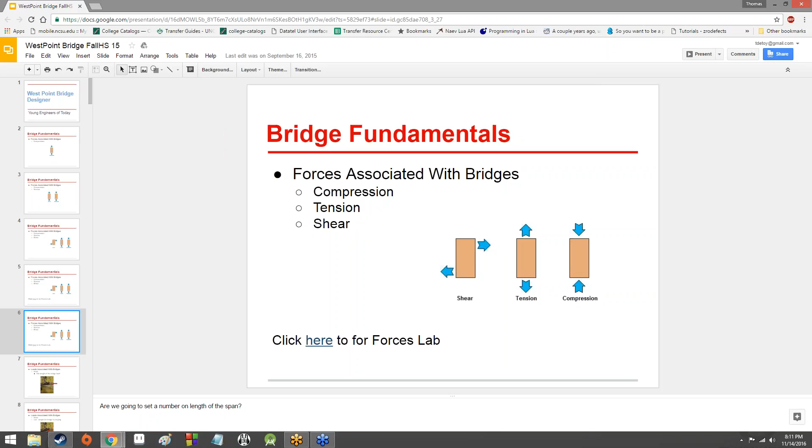Loads will cause stresses on the bridge. The most basic load, and if you can't have a bridge that handles this load then you've not built a very good bridge, is a dead load, which is just the weight of the bridge itself. You build a bridge out of materials, and those materials aren't going to weigh nothing. We haven't devised entirely weightless materials yet.

We have to deal with gravity. It's a fact of life, it's reality. So the materials themselves are going to exert forces on the bridge just by virtue of the fact that they exist.

Your body exerts force on itself by virtue of the fact that you weigh something. Your head exerts a force on your neck. Your arms exert a force on your shoulders and your back. Your torso exerts a force on your legs. It's just kind of how it is.

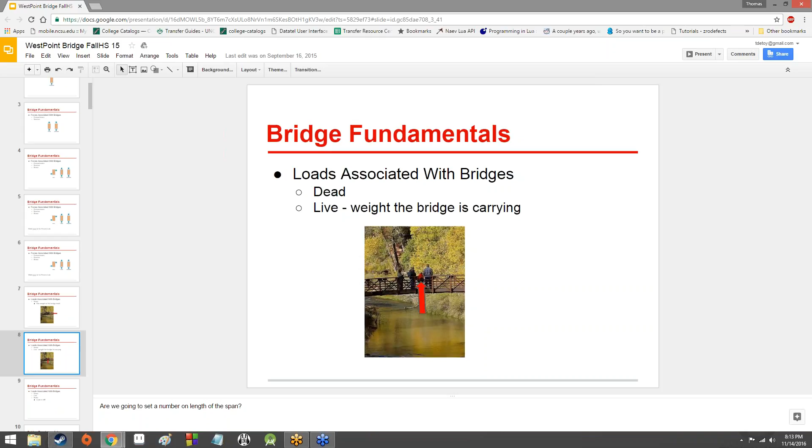Now, there are a couple different kinds of live loads. Live loads could be static, so the load is still - those could be toll booths and signs and things like that. Or they could be dynamic and moving, so they could be cars.

And it's important to note that loads can move between static and dynamic. A car could be driving across the bridge, hit traffic, and have to stop - and they've just gone from a dynamic load to a static load. Then the traffic lets up and the car can start moving again, and they've gone from a static load back to a dynamic load. So it's not outside the realm of possibility that loads won't stay either static or dynamic. You have to deal with that as well.

Then you've got thermal load, which is basically just load created by the atmosphere making the bridge hot or cold. So if it's a really sunny day, the bridge could get hot. Dead of winter after it's been snowing, or a clear night in the dead of winter, the bridge will get cold.

And these can actually be loads on the bridge as well - how many of you have accidentally stuck a drink in the freezer overnight and had it either overflow or explode, once you remember it the next day? If you have, that's because thermal expansion is a thing. Water, as it goes from a liquid to a solid, expands. And that actually causes all sorts of havoc for infrastructure for a number of reasons.

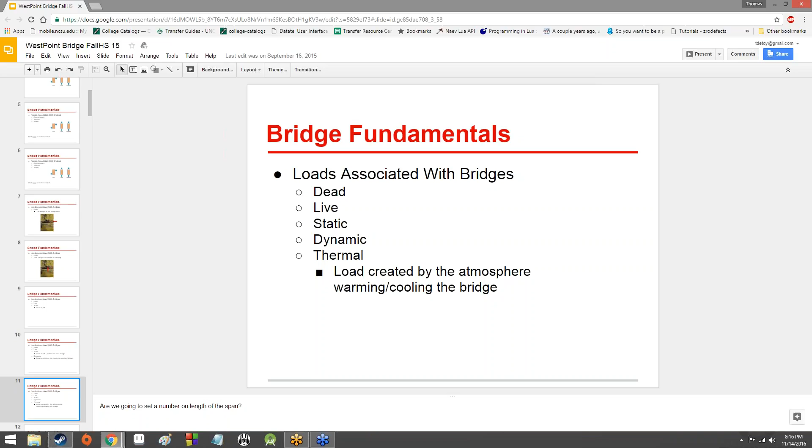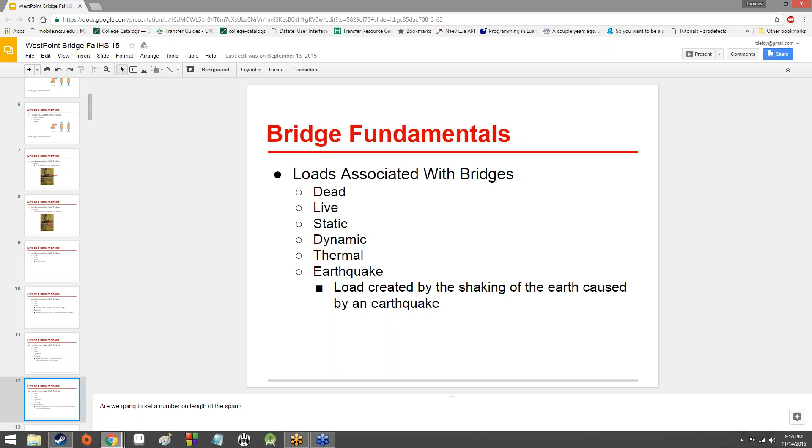More obviously, there are earthquake loads, which is a load created by the shaking of the earth. Seems pretty self-explanatory. You got wind loads created by wind shaking the bridge, causing it to sway or vibrate. And those can actually be really, really nasty, much more so than you might anticipate. If you're thinking, oh, if your building falls over because the wind blew it over, you got a really bad building, or if your bridge falls over because the wind blew it over, what a bad bridge - yeah, okay, you wouldn't be wrong, but not necessarily for the reasons you're thinking.

There are physics glitches, which is not really a proper way to put it, but it's kind of how I like to think of it, that can do surprising things to structures. Aside from the fact that wind is just really, ridiculously strong - that's actually something we touch on a little bit later in the lesson, an example of a large bridge that collapsed because of wind.

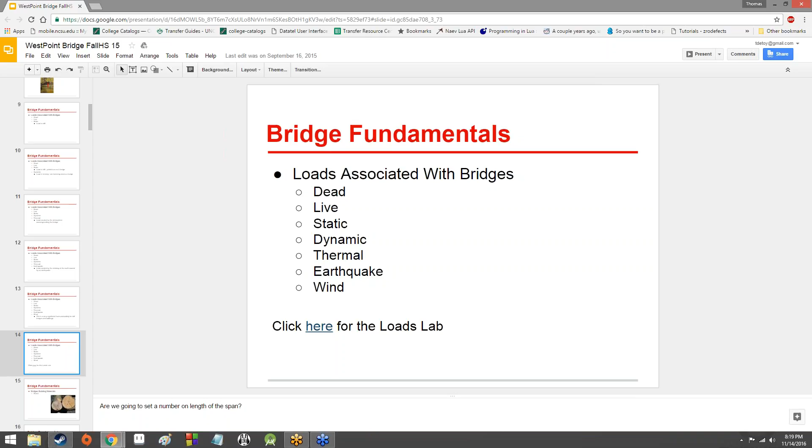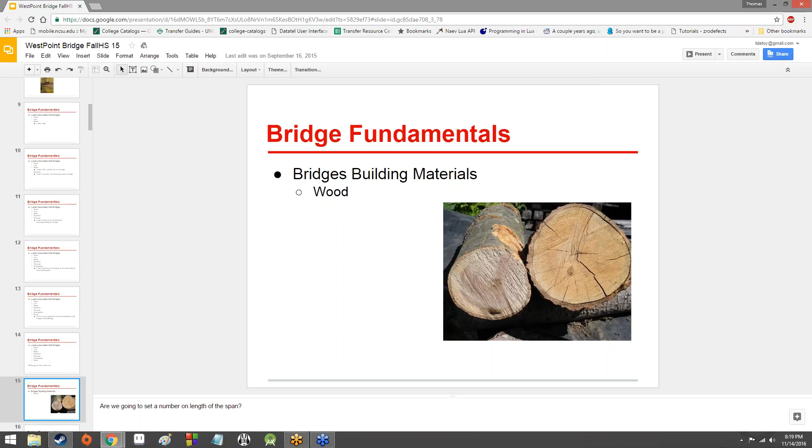Anyway, materials are also an important thing to take into account. For instance, you can build your bridge out of wood, and then you've got a wooden bridge. A wooden bridge can be pretty good because it's pretty cheap, and it can also handle tension and compression pretty well - it's strong, but it's also pretty flexible. So as the bridge starts to compress at one point, the wood's like, no problem, I got you. And then another part's going to start to stretch out a little bit, and the wood's like, nah, it's all good, just let me know when you're done and I'll go back to my normal length. And it's fine, it does that very well. On the other hand, it is super cheap too, which is really good because it's just a tree - you just took a tree and kind of shaped it.

But on the other hand, wood can rot, and you have to replace those pieces that rot. It can bow, which means you have to replace it with fresh wood, because at a certain point, if you bend wood enough, it's going to stick in that particular way - kind of how old boats were built, and new wooden boats are still built that way too. But that bowing will cause stress on the bridge, because a piece of wood that's bowed from age and force exerting on it isn't going to hold its weight nearly as well as pieces of wood that are nice and new and fresh. So for that reason, you do have to spend a fair amount of money actually maintaining the bridge. Where the wood can be cheap, if you have to pay the material costs to replace that wood over time, it's not really all that cheap.

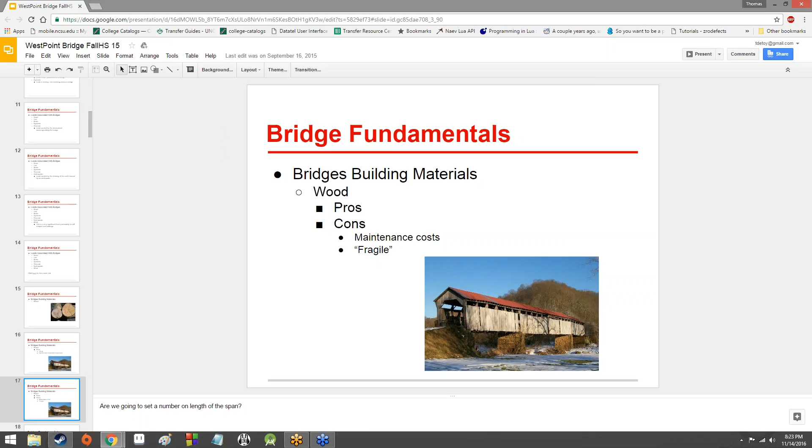Boats definitely, but bridges less so. Because boats and planes and stuff like that, you definitely want a fair amount of rigidity in there too. You do want some flexibility, because like the old saying goes, if something doesn't bend, it breaks. But you also want a fair amount of sturdiness and rigidity in there as well, more so than you'd want in a bridge.

So you've got wood, you've also got concrete. It's cheap. Concrete's cheap, just a bunch of dirt mixed together in a specific way and then laid out, basically building a dirt and rock bridge. When you put it like that, how could it not be cheap?

It's very good at handling compression. Concrete don't care if you try to smash it, concrete just sits there. It's fireproof. If you tried setting a regular rock on fire, it doesn't really do all that well with fire, granted there are certain types of rocks, but yeah, concrete tends to be pretty fireproof.

It tends to be pretty weatherproof as well. Stuff like wind and things like that, it tends to hold its own pretty well against, with a couple of exceptions. But it doesn't handle tension well. Concrete will crack under tension, just like people do - although that's more emotional and psychological tension I was referring to.

Concrete isn't one of those bendy rocks. And concrete is impacted pretty strongly by thermal load. Concrete tends to be fairly porous, so water will get in there, and if things get cold, the water freezes, and it just wrecks the concrete from the inside out, totally demolishes it. Then suddenly you've got this wrecked empty spot in the middle of it, and cars drive over it, and the hard outer shell breaks.

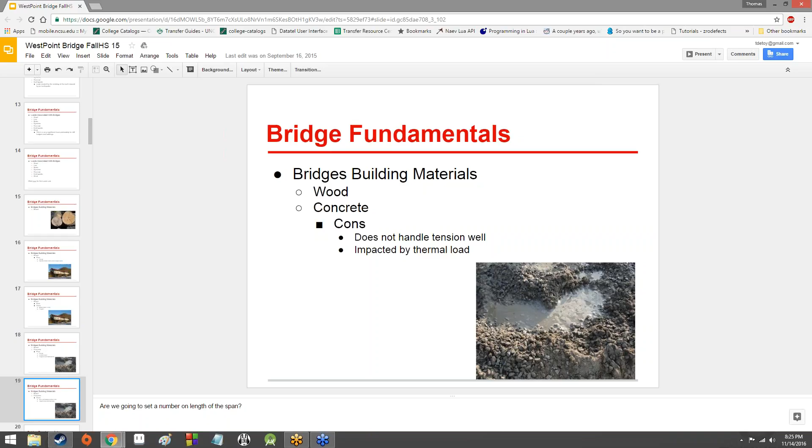So in order to increase that structural integrity, you might reinforce the concrete. You might, as you're making it, stick a whole bunch of metal bars inside of it, which can be pretty effective. In fact, it does a very good job at increasing concrete's ability to withstand tension, because concrete does very well with compression - press on it, concrete's like, yeah sure, okay whatever. And then you start trying to pull the concrete apart, and it goes, oh no, I don't do very well with this. And then the metal inside goes, don't worry, I got you.

I'm providing some additional structure so that you don't actually just crack and fall apart. And in case you do crack, you still got me for structure. I handle tension pretty dang well. And so it tends to have a pretty solid design. It's also still low cost because you don't really use a whole lot of metal, and you don't use a whole lot of expensive metal. And the bulk of your building material is, well, still rocks.

It's fireproof and it's weatherproof, just like concrete is. However, it still doesn't do very well with thermal loads for the same reason, and just the fact that the metal will also expand and contract, and that will kind of play havoc on concrete. So, pros and cons.

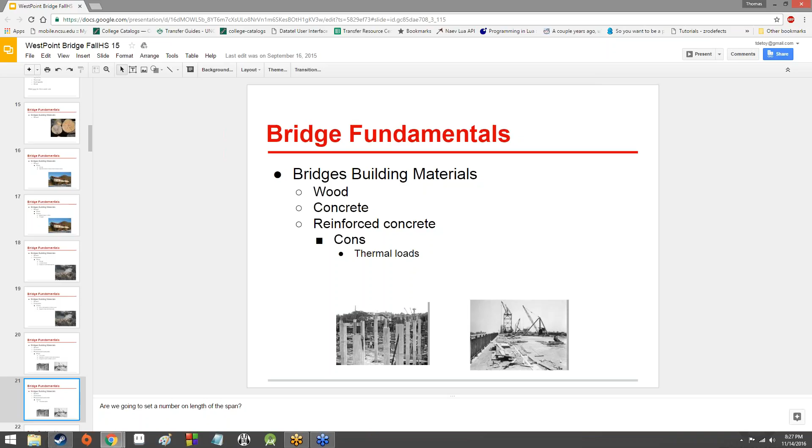This is a very common type of bridge. It's reinforced concrete. You'll see this a lot.

So cast iron, now we're entering into the pure metal bridges category. Cast iron is good, it forms in any shape. The name comes from creating a cast and then putting iron into it. It's good for casting, so it's cast iron because it's cast, then it's iron. So cast iron.

It can form in any shape, so you can do more complex, exotic designs for your bridge, something more efficient at distributing weight, or maybe it's prettier, if that floats your boat.

It handles compression pretty well because it's metal. It's cool with it. And it's fireproof because metal doesn't really burn, it just melts generally. And if your bridge is melting, you've got bigger problems than your bridge losing structural integrity.

Your more pressing problem is probably the fact that the ambient temperature is high enough to cause metal to melt, in which case you should probably find a new place to be like 30 seconds ago.

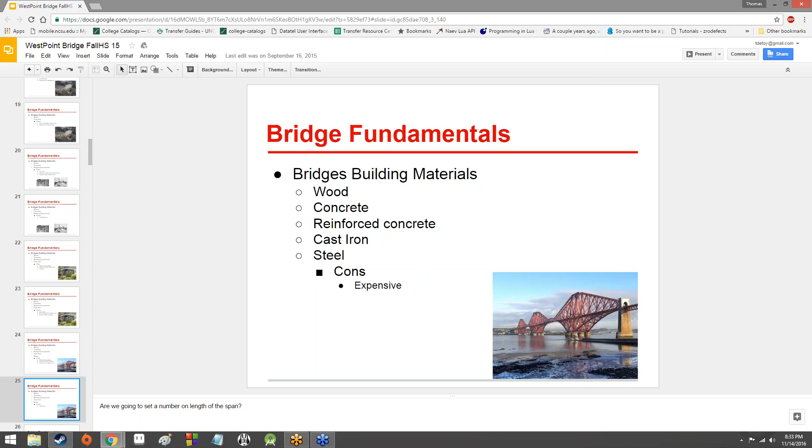There's materials lab. Not a terribly interesting material lab. Yeah, copper. Yeah, that's a thing as well.

So hopefully this gives you some idea of what material you might want to build a bridge out of, given adequate knowledge about the circumstances under which that bridge will exist. Is it going to have a lot of cars driving across it? Any cars at all? People walking across it all the time? Is it going to be a small bridge, or does it have to go across a large expanse or span, which is the technical term? Does it have to allow things to go underneath it?

Is it going to be in an area where the weather changes frequently, or one that's humid or rainy a lot of the time? You get the idea. If you have that kind of information, you might be able to get an estimate as to what the best material might be. If you're building this for your own house, you should probably use wood. If you're just bridging a little creek or something like that, wood would work fine.

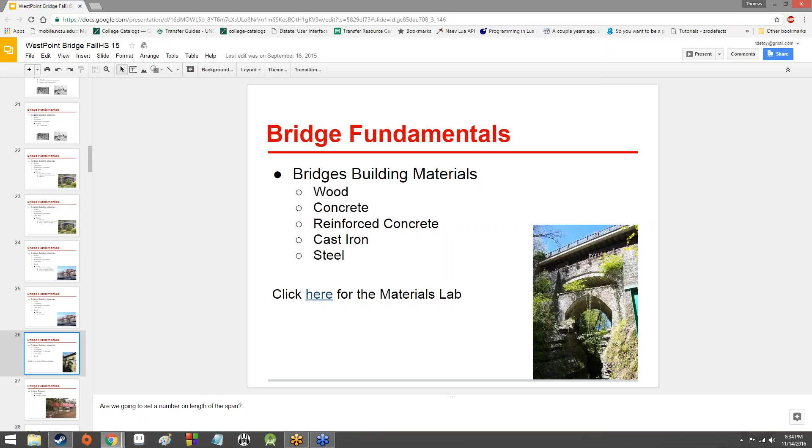Now, bridge shapes. The shape of the bridge is something you're going to want to take into account, because it will also determine how effective it is at carrying loads. Rectangle bridges, like this thing right here, aren't that great.

Yeah, exactly. Reinforced steel. Yeah, I brought out my TIG welder and spent about a year and a half building this thing, and I had to take out a second mortgage on the house. But man, I rest easy at night knowing my ankles aren't ever going to get wet walking over this bridge. Exactly, worth it.

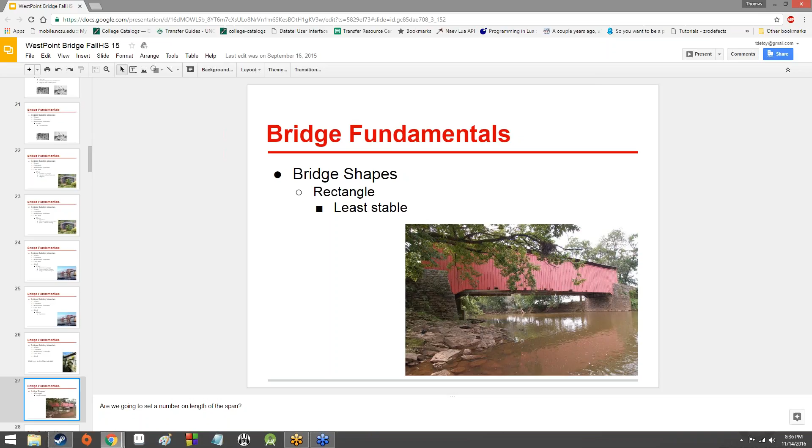But yeah, rectangle design is the least stable. Not very good at holding itself or other things up. It does well enough, obviously—the fact that these bridges exist in modern day means they probably haven't fallen over yet, so they're probably stable enough. But it's not a great idea; I don't really recommend it for something you want to stay up. It'll do the trick in a pinch, though.

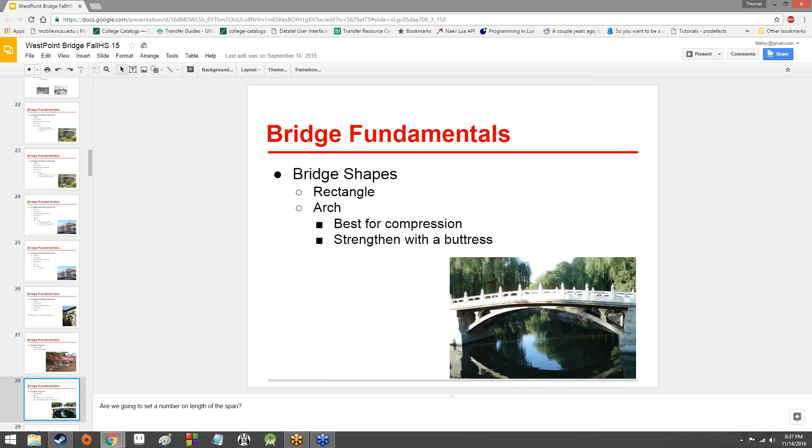Arch bridges are best for compression, and you might want to strengthen them with a buttress, which is an actual thing—not just a made-up word that resembles 'butt.' A buttress is a type of support. You can use one to strengthen an arch and make it even stronger, and it does really well for compression because it spreads that force all over the length of the arch. So you don't just have hot spots on the bridge that become failure points. Arches are good for that.

And then you've got triangle bridges. Triangle bridges do really well with both compression and tension, and they're strongest at the points. The reason these bridges are very good is because they're able to spread that force around. You want to be able to do that, because you don't want any one point on the bridge to experience so much force that the material fails there. If you can spread the force out to other points on the bridge—share the love, so to speak, distribute the force—then your bridge overall will be able to withstand more force.

Because, let's say you've got a material that can withstand 5,000 psi before it snaps. If every single point on your bridge is experiencing 4,990 psi, you technically haven't reached the failure point of that material. Now, you probably have a whole lot of weight on the bridge for every point to experience that much force. But the fact that your bridge is able to effectively spread around all of that force means that the weight on the bridge is probably higher than 5,000 pounds—extremely heavy. Now, if you have a bridge that's very inefficient at distributing weight, it will be a lot easier for a given spot on the bridge to experience that maximum force and snap. So, you tend to be able to carry higher loads on bridges that distribute force well.

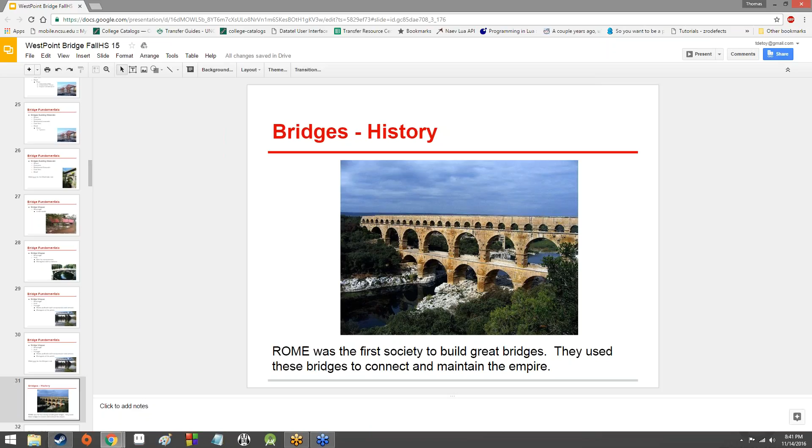Now, one of the things Rome is very famous for is the arch bridge. The arch bridge is very useful for crossing over rivers that have river traffic, because stuff can go under it. Nobody's really surprised by that, but it's definitely a thing they're known for, and it's a very popular design still in use today.

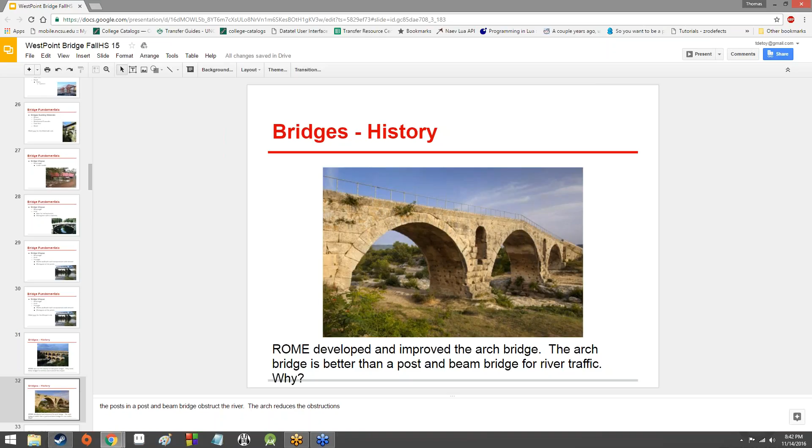So, good work, Romans. We're still doing as the Romans do, and we're not even in Rome. The arches in the Colosseum. Yeah. Thank you.

Presumably nothing much happened with bridges for years and years, until iron really came along and was widely used. People went, hey, what if we use this iron to make a bridge? We got enough of it, and they built a bridge out of it and went, this is actually pretty strong—until one of them randomly failed one day. But on the whole, they were able to do more with iron.

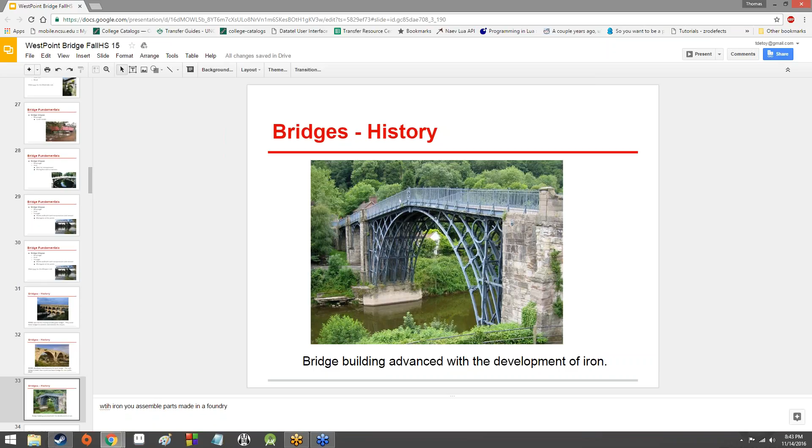What kind of more did they do with iron? Well, they were able to start developing and building the suspension bridge—they being humans in the past, I'm not an alien, I promise. The suspension bridge is immensely useful because it can cross spans that other types of bridges can't really even touch.

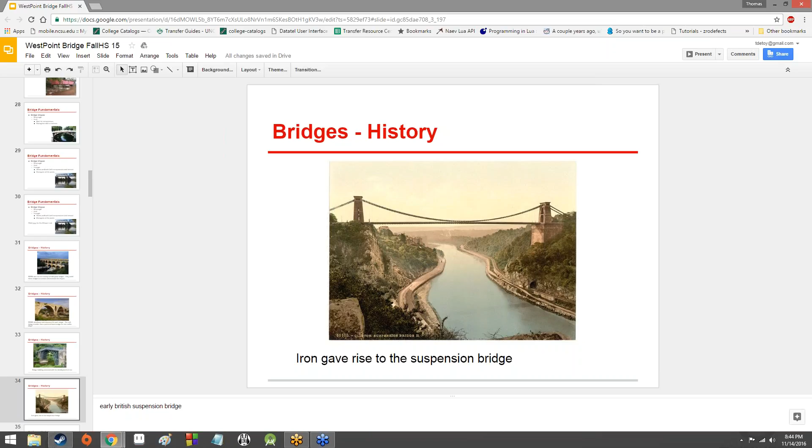You can't build an arch bridge across a span that large. A suspension bridge, however, is able to support like a champ, because the iron is strong enough to be used on something like a suspension bridge. It's pretty stable—it's no Tacoma Narrows Bridge.

The Brooklyn Bridge is actually one of the first modern suspension bridges built across a great expanse, they say. It's a pretty long expanse, so good job with the Brooklyn Bridge there. But the Brooklyn Bridge may just be one of the first ones.

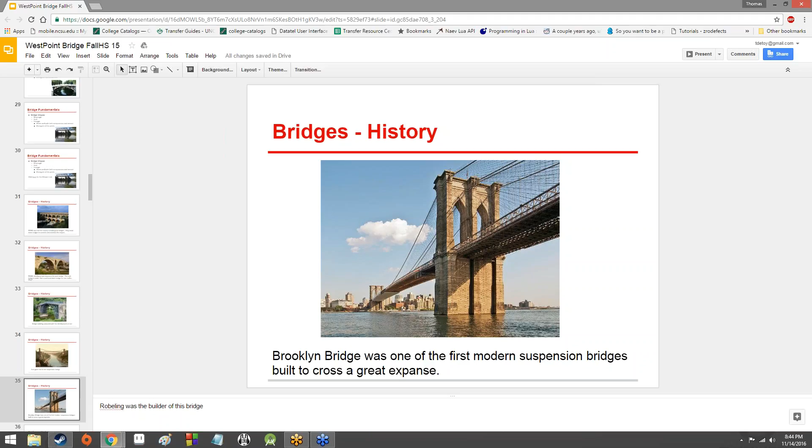The Orange Gate Bridge—yeah, I kind of wonder if it was like oxidation. I was talking about this with my middle school class. I'm not entirely sure why it's the Golden Gate Bridge, because I know California is known as the Golden State, but I don't know what makes this the Golden Gate, since it goes from one spot in California to another spot in California. So it's not like it's a gateway to the Golden State.

Is that what it is? Okay, well that explains it. Thank you, Mateo, got the answer right there—gold paint, all stripped off. So yeah, there you go, it used to be golden. That explains a lot. I come from that state and I don't even know the history of my own bridge. But whatever, oh well.

But the Golden Gate, yeah, definitely one of the most famous suspension bridges in the world.

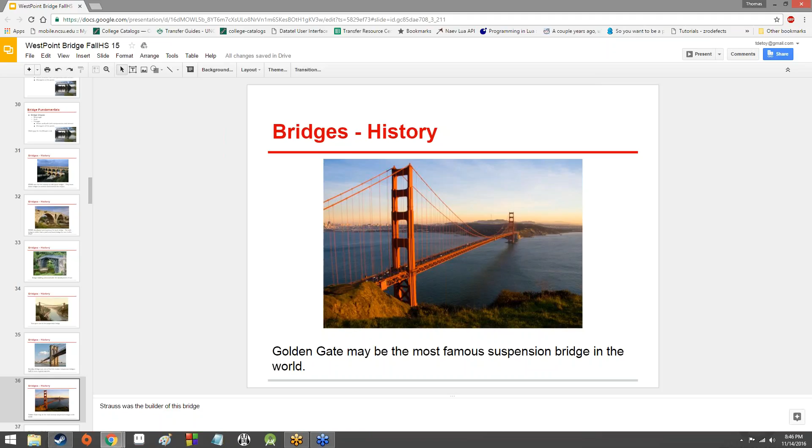Now, I've talked about how you want some flexibility in a bridge, and you want to be able to build a bridge that has some give with forces being exerted on it, but you don't want too much necessarily, because too much flexibility can actually cause a bridge to collapse.

Like the Tacoma Narrows suspension bridge actually collapsed because of that. The wind. Yeah, the collapse was actually caused by the wind hitting a specific frequency on it, if I remember correctly.

Sort of a similar thing to harmonic resonance, like that stereotype about opera singers hitting a certain note and causing glasses to shatter. A similar sort of thing where the wind was actually causing the waves in the bridge—an engineering error—to be more extreme than they would be even if the winds were a little faster or more intense.

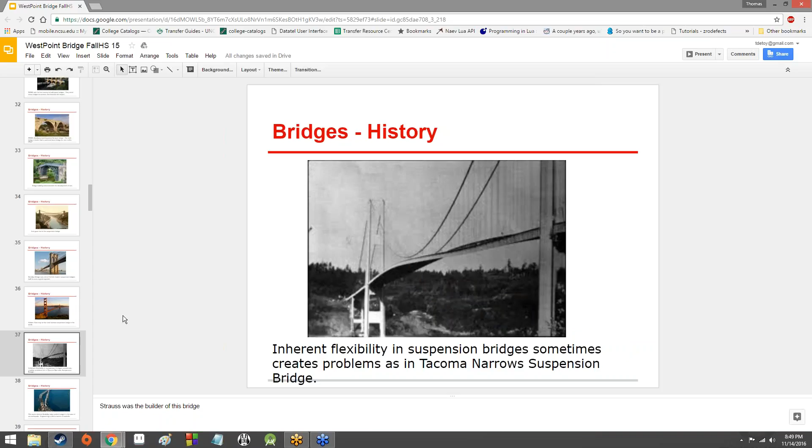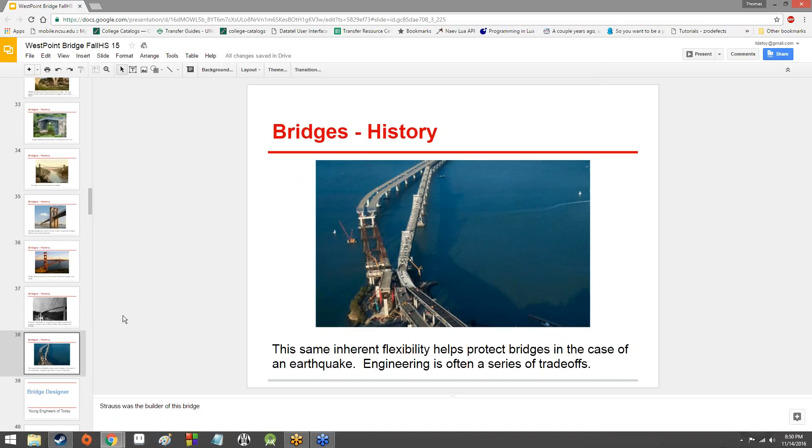So with that in mind, we're not actually going to get started on it today, but on Wednesday we're going to get started with some bridge design software—the West Point Bridge Designer, Contest Designer software. Anyway, the bridge contest.

Yeah, definitely, I'm going to send it. I actually followed it first because I was hoping it would pop up with the security warning. You guys are probably going to get a security warning when you visit the site. Certainly with Chrome, and I believe with some versions of Firefox, you should still be able to—there should be an option for advanced. Like when you see it's like, oh, this is not safe—the certificate on it is old and it's listed as an HTTP secure site, so Chrome's going to freak out on it.

But we've used this site in the past, we know this is the legit one—they just don't update the certificate on it for some reason. So you're going to get this thing saying this website is not safe, you probably shouldn't visit here. But with Chrome, there should be a link labeled advanced at the bottom. Click on that, expand it, and then there will be another link which appears which says continue to it anyway. So just go ahead and click that.